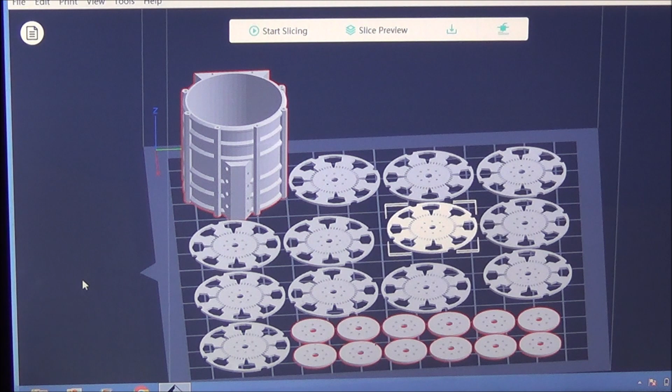Let me go ahead and move this image around for you a little bit so you can see that I've tried to replicate the rotor blades that I created out of the original stators inside of that stepper motor. I've recreated even the outside little notches on the blades.

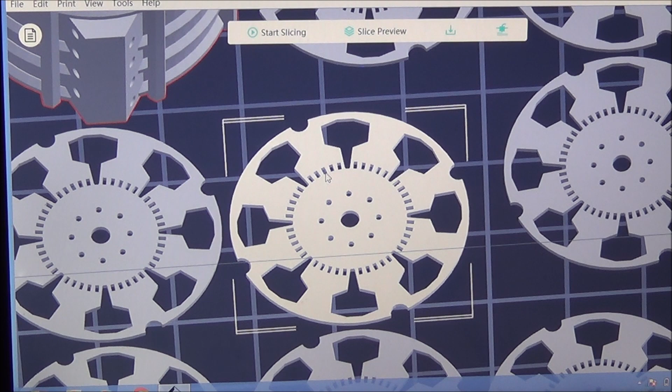Let me go ahead and zoom in for you a little bit so you can get a better image at those. See, I've even recreated the teeth that were in between the original rotor and the outside stator blades that we hooked together with a little cotter pin. I've got the notches in the outside of the blade, a very similar pattern cut out on the insides of each one of those rotors. So let me go ahead and zoom back out for you here. And there you go. So there's the entire build.

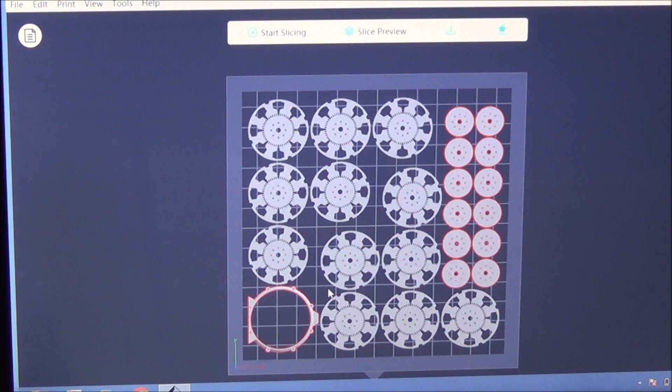We've got spacers right here. They're going to actually create the space between each one of these rotor blades. So we've got enough of those ready to go. We've got the case over here. If I change the angle, you can see just how deep that case is. Up here at the top of the case, we've got input holes on both that side and over here on this side. Let me go ahead and zoom in on those so you can take a look at the input holes and how they work.

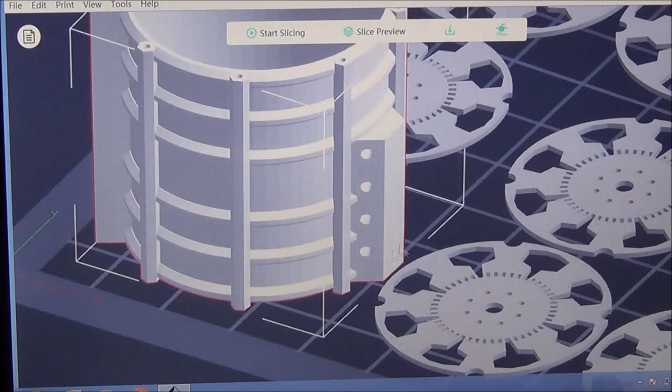Go ahead and move that over here so you can see it. Alright, so those are the input holes right there, those 4 holes. And we'll go look inside of the case here. And you can see right here are the input holes coming into the case. So I've got input holes coming from this direction so we can spin it one direction. And then I've also got them coming in the opposite direction so we can reverse the direction of spin.

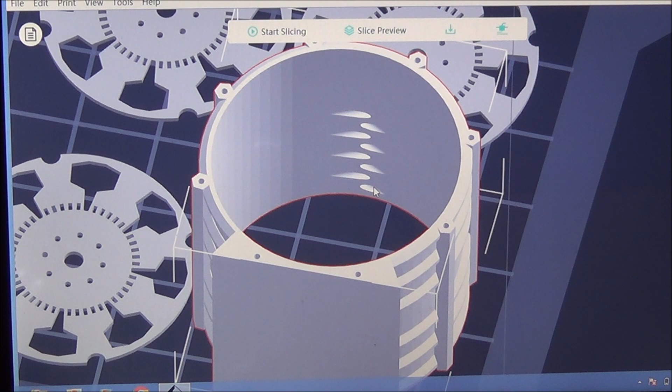We've got 4 different holes so we can actually increase or decrease the amount of power going into the turbine based on how much actual air or steam or whatever we're actually using to fuel this. Let's go ahead and zoom back out for you here. Sorry, it's a little hard to do. I don't have the mouse going, just using the keypad here.

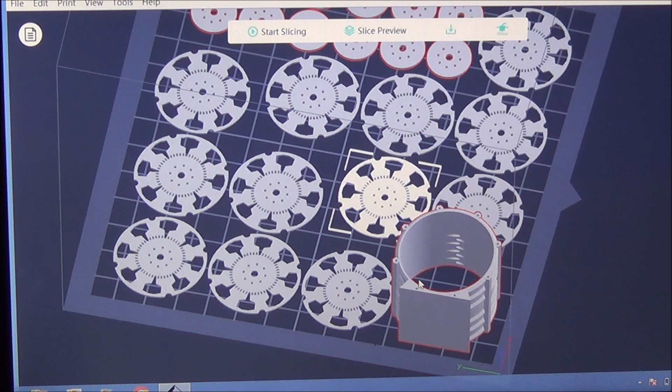So there you go. We've got 12 rotor blades. We've got the 12 separator discs that we're going to use to separate the rotor blades. We've got a case. I don't have any room left on the build plate here to build the top and the bottom cover to the case. We're going to have to go ahead and do that on a separate print, and I'll show you that.

But if you stay tuned here, what we're going to do now is I'm waiting for one of his printers to get done working, and once it's done, we're going to load this file into that printer, and as it prints this out, I'll get some film of it and put it together kind of as a time lapse so you can see the build process take place.

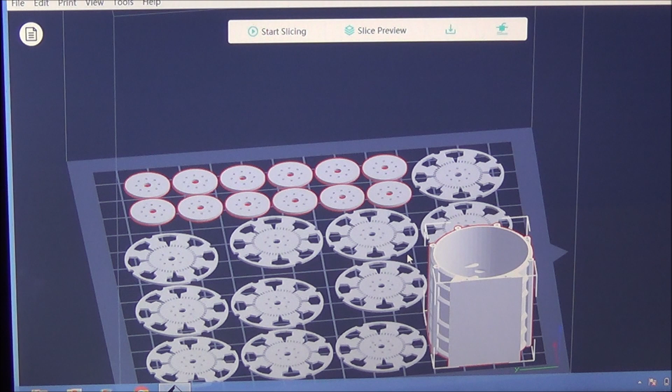Once we're done building the turbine, install a steel drive rod down the middle of each one of those rotor discs. We'll put some bearings in there. We'll attach that all together in the case, and we'll actually give this little prototype a test spin with some air pressure and see just how well it works.

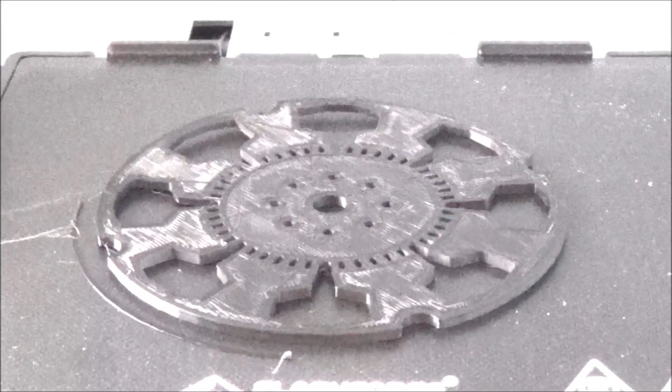There you go, guys. Our first large disc for the much larger Tesla turbine is finally done printing. We're going to go ahead and print out 11 more of those. Alright guys, so here's the case printing. Because it took so long to print and this isn't my place, I had to go home. Wasn't able to get a time lapse of this printing.

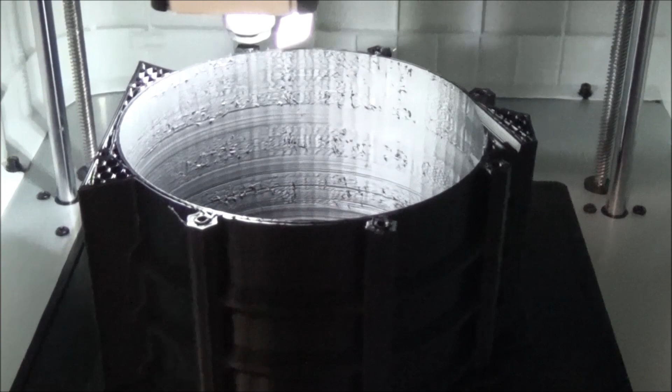Just came back, it's 9 o'clock here in the morning. And we've got about an hour and 5 minutes left on the print. And that's what it looks like. You can see the air inlets right there. I'll show you guys what it looks like when it's done.

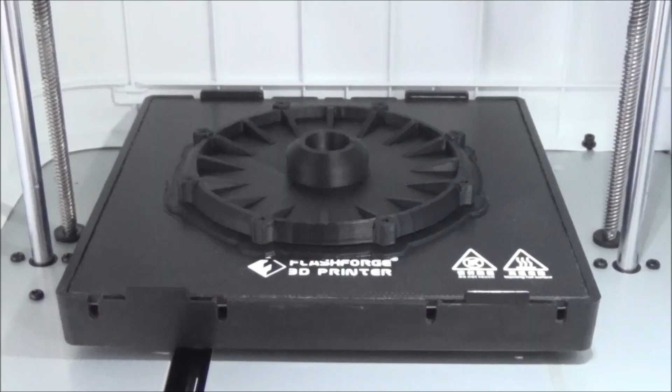Alright, there we go. That is the back cover to our Tesla turbine. Completely printed. I've got to let it sit for about 20 minutes or so and cool down. It'll pop itself loose from the build plate. And then we'll start printing the front plate that has the output holes.

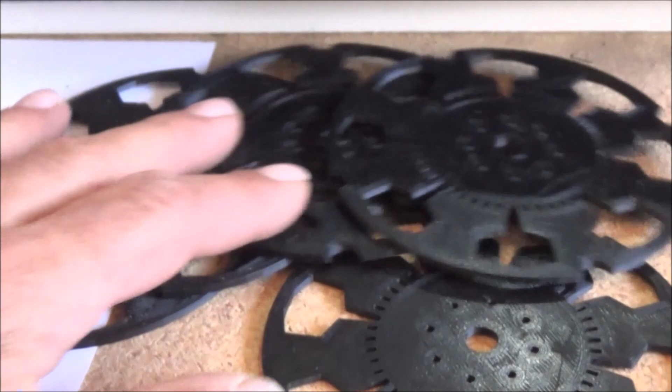And once that's done, all we've got left to do is print the spacers and the rest of these rotor blades. Right now we've got 5 of them. There's a 6th one printing at the moment. We have the case ready to go. Looks like a pretty good size. It's even bigger than the original.

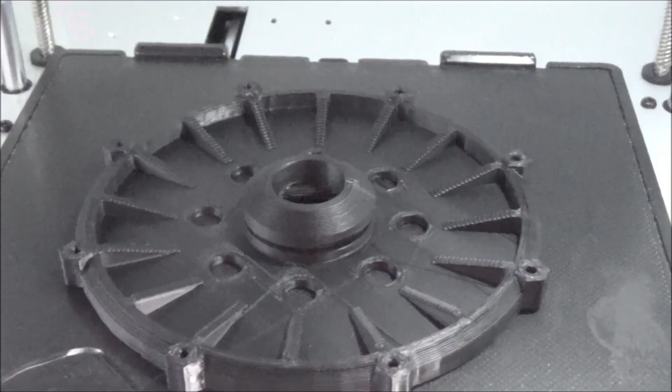Alright, so our output cover is ready to go. I think it's cooled down enough. Oh, look how easily that came off the build plate. Looks like there's a little stringing inside the bearing cup, but other than that, the print looks like it turned out pretty good. Here's our first batch of spacers that go between our rotors, giving us the space we need.

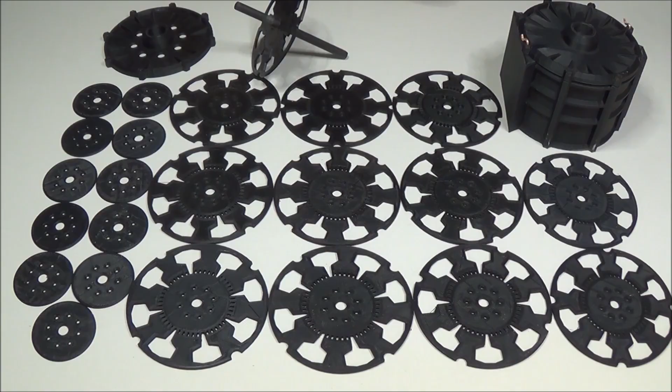Alright guys, so we've got all of our pieces back at home. They're all printed and ready to go. We're going to start assembling our Tesla turbine today. And I'm going to first dry assemble it and lock it all into place with some keeper wire. Put it into the case dry, give it a spin, make sure everything looks right. And then I'm going to glue it together with some super glue.

And as we build it, we'll be making sure that each one of these outside little grooves that you see here, these outside little notches, are stepped just slightly off from the next. And that way it does the exact same kind of stair-stepper style effect that we had in the original Tesla turbine design. Real quick, let me just kind of show you all the parts.

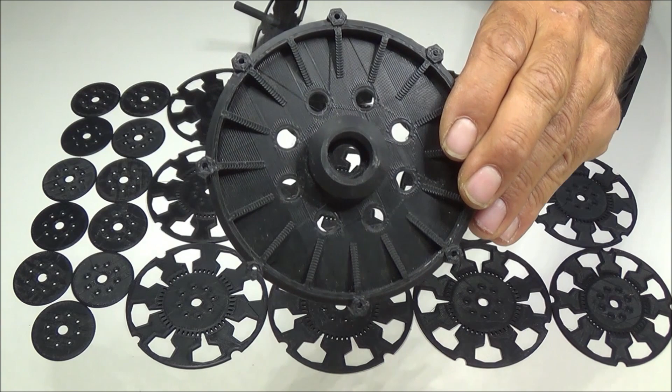We've got the output side of the turbine right here. You can see all the output holes. And because we're going to be using water for this, I have a feeling I'm going to end up having to either remake one of these with quite a few more holes than this one has, just to let the water out without actually backing up in the system at all. We may just drill into this one. We'll see what's going on with that as we get there.

Over here we have the case and the back cover plate ready to go. I've just got it in place there so I can use it to build off of. I'm actually going to set it down just like this.

We're going to take the drive rod piece there, we're going to set it on that just like that, and I'm going to start stacking the rotors on top of each one of the spacers. I'm going to step them all off, and then we're going to use a little piece of this PLA wire that we've got right here. I'm going to stick that down through the little holes that you see in the center right here. We're going to lock all of those together as we build it and make sure it looks right, and put that together dry with these little wires, and I'll show you that as I'm going.

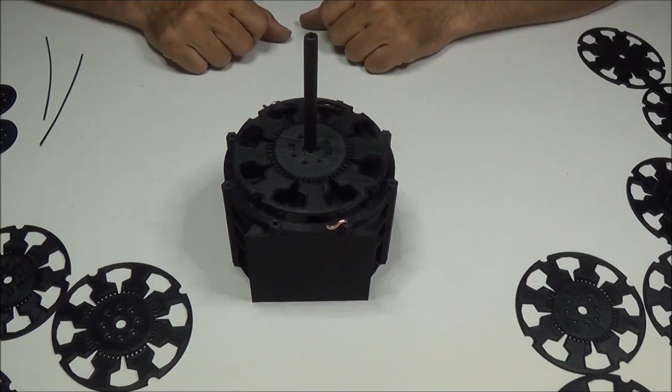Okay, so we're ready to start building. I've already got the initial rotor and a little spacer on there. Hopefully you can see that. What we need to do now is line this all up and keep that spiraling staircase look to it as we build. So let's go ahead and grab a rotor. We're going to slide that down over the shaft here. Could take a little bit of pressure to get this started. There we go. Okay, so we've brought it all the way down. We've got them ready to go.

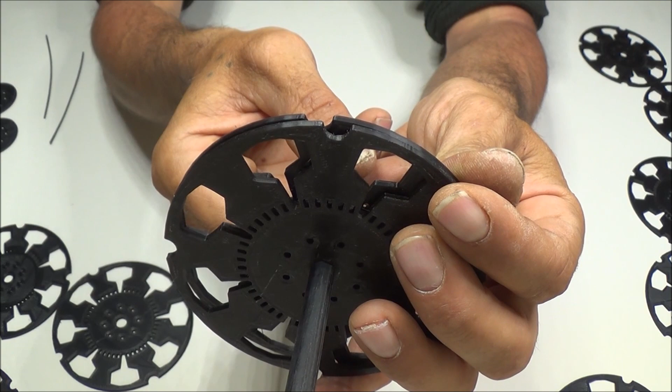I now need to start offsetting that bottom edge, and you can see that's way off, so we're going to need to bring it over to somewhere right about like this. Hopefully I can get that in the camera for you. Line up. Now you see these rotor teeth are starting to line up right here, and that's what I'm actually looking for originally, is I'm going to try to line those up as we step through this, and that'll allow me to get that stepped look, and then I'll go through and line up the spacers and the holes in the spacers.

Alright, so we've got another spacer here, and this is definitely a little bit of a chore to get these things started. Once they get started, they go down pretty well. There we go. We now have 2 rotors and 2 spacers. They'll start getting much closer together. Let me go ahead and push them together and give you an idea of what it'll look like. So there you go. Let's go ahead and start adding another rotor.

Boy, that's not easy to get down on there. I don't want to break them. Okay, there we go. And one more of these spacers. And there we go. Let's go ahead and feed on another rotor.

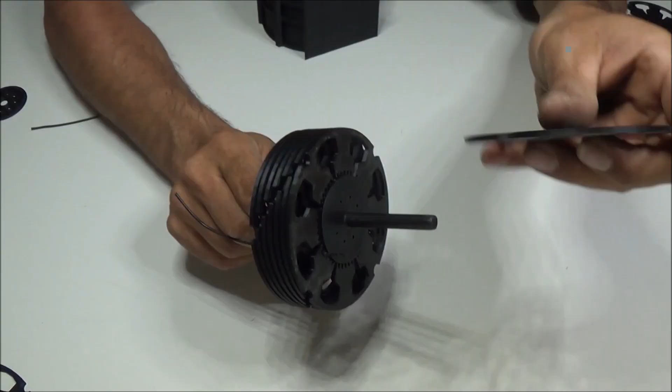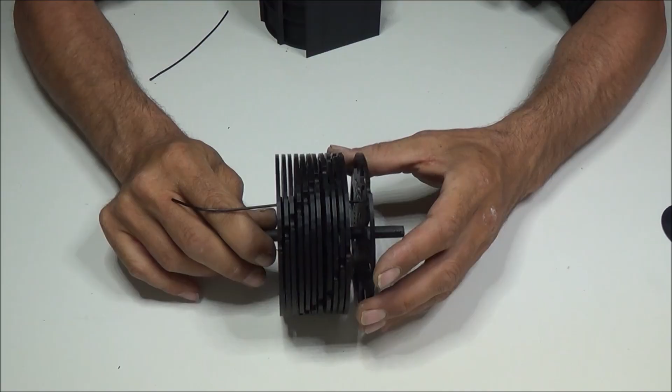Alright guys, so the next step of this is to make sure, before we glue this all together, that this fits inside of our case right. Looks like everything's going to be centered okay. Let's go ahead and try to dry set that and make sure it's good, and then we'll put this thing together and give it a good spin up. See how well our homemade Tesla turbine works.

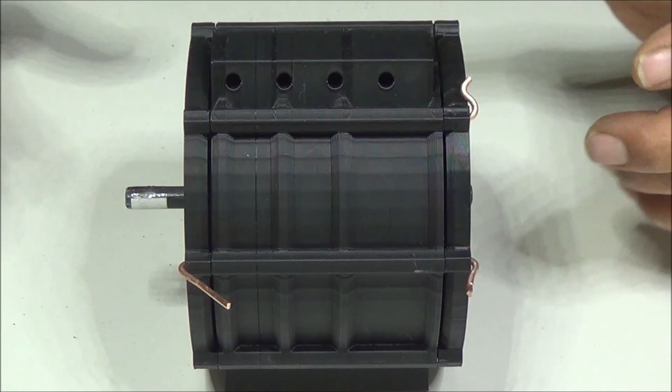I've got the whole thing assembled. We've got the rotors there on the plastic rotor shaft right now. I printed out a couple plastic bushings and stuck them inside of it just so we could give it a spin to see if the clearances are good, to see if everything centers right. I've got some pieces of copper wire I've stuck all the way through the entire body. These are hollow, and I bent them over on either side just to hold our case together, and the lid's on there, as you can see there. I put a little piece of white paper and some tape on the rotor so when I spin it you can actually see it spin.

And right now that's just plastic on plastic bushings. That wouldn't work if we were using this with compressed air. The heat generated by that plastic on plastic friction would definitely melt itself together and lock this thing up or melt down the drive shaft. But because we're actually testing this out originally with really cold, high pressure water, I don't think we're going to have an issue giving it its first primary test.